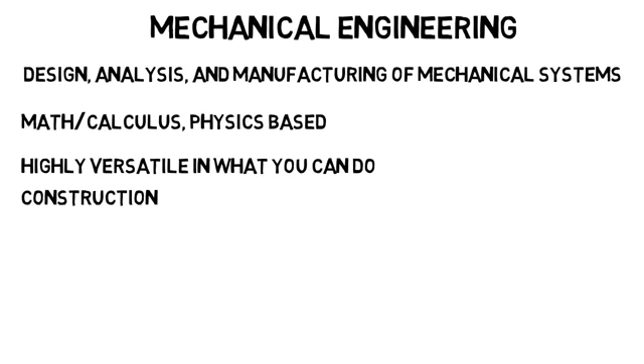Mechanical engineering is a branch of engineering that focuses on the design, analysis, and manufacturing of mechanical systems. This major is highly math, especially calculus, and physics-based. One of the great things about mechanical engineering is that it is highly versatile in what you can do. Students who graduate as a mechanical engineering major can go into construction, automotive, heating and air conditioning, materials, robotics, work in the energy sector, combustion engines, and many more.

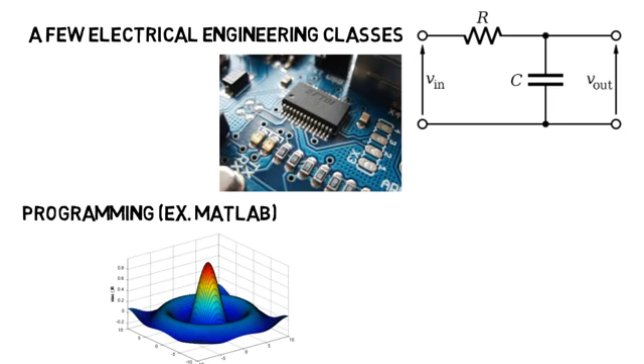Besides mechanical engineering classes, you'll take a little bit of everything basically. You have to take a few electrical engineering classes to learn about the basics of circuits and possibly some of the basics of electronics as well. You have to do a little programming and become decently proficient in MATLAB, a software that allows you to create plots and graphs and do complicated math way beyond what your graphing calculator can do. You'll possibly have to do a welding class, then of course you have to take about 2 years of math, mostly calculus, and about 1 year of physics.

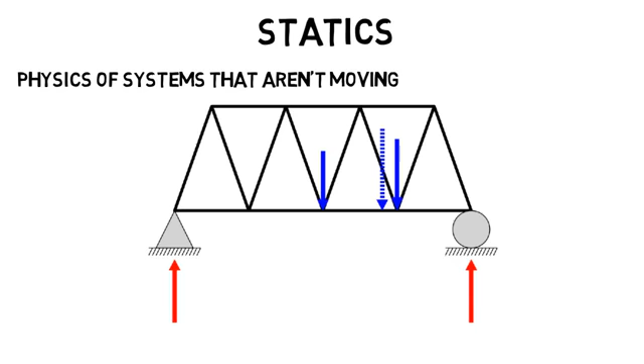The first main class of mechanical engineering would be statics, where you'll look at the physics of systems that aren't moving. This would be like looking at the forces and torques in something like a truss that holds up a bridge, where you have to analyze the forces that individual beams feel due to external forces.

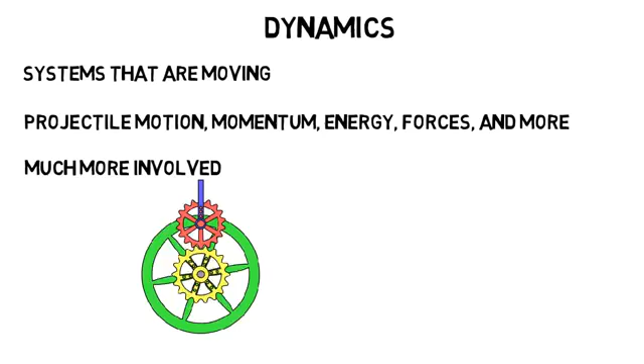Then the next class would be dynamics, where you look at systems that are moving. It's similar to your high school physics class with projectile motion, momentum, energy, forces, and more, but is much more involved. You'll look at the motion of much more complex systems, and have to find things like velocity, acceleration, energy, force, and more of different parts of that system.

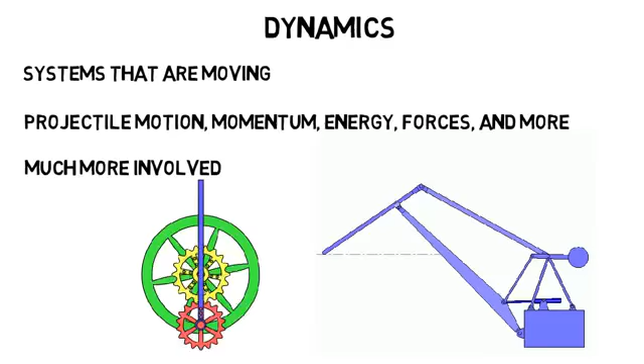Then your third year, you'd even take a more advanced version of this class, where you look at these complex systems, but now in 3 dimensions. So as you can probably already see, mechanical engineering involves a lot of advanced physics.

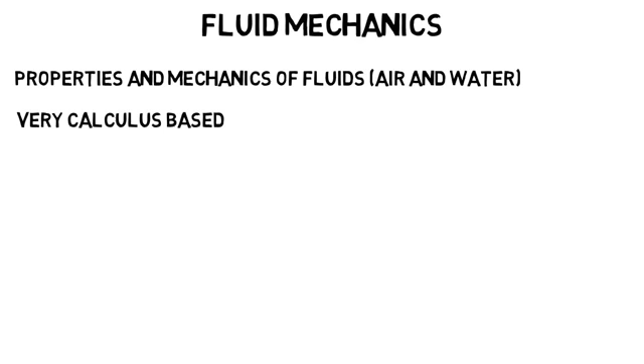When you enter your third year, you'll take a course called Fluid Mechanics, where you'll study the properties and mechanics of fluids such as air and water. This class is very calculus based. For example, you could study how the pressure of water changes as it flows through a set of pipes in a closed environment as height and pipe dimensions change. The principles to solve this are foundational for how your car brakes work.

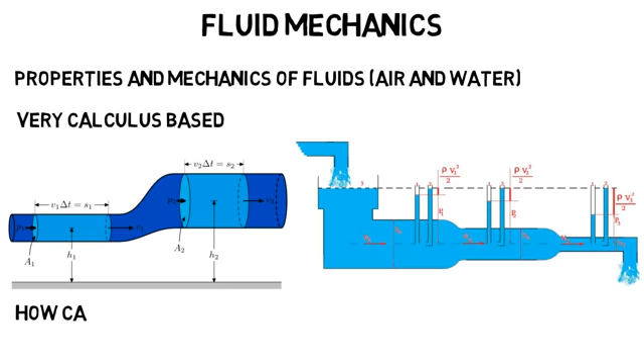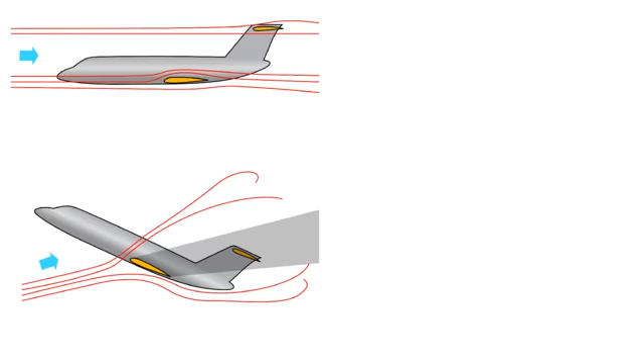This class also includes the physics of how wind turbines work and why they are made the way they are so that they move as much as possible from any amount of wind. You can analyze why different shapes are better or worse. And if airplanes interest you, you could even learn how wind flows over a wing to produce aerodynamic force, which also applies to car aerodynamics, which if optimized increases cars' MPG.

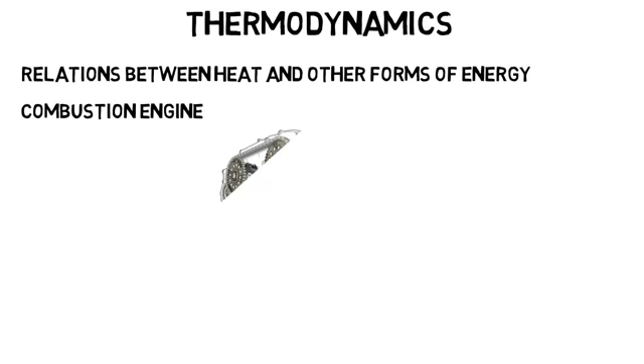You also take a class called Thermodynamics, which deals with the relations between heat and other forms of energy, such as mechanical, electrical, or chemical. In this class, you'll study the combustion engine, which applies to cars, boats, and aircrafts, and you'll learn these engines in great depth and see how they are constantly making adjustments to make them more efficient.

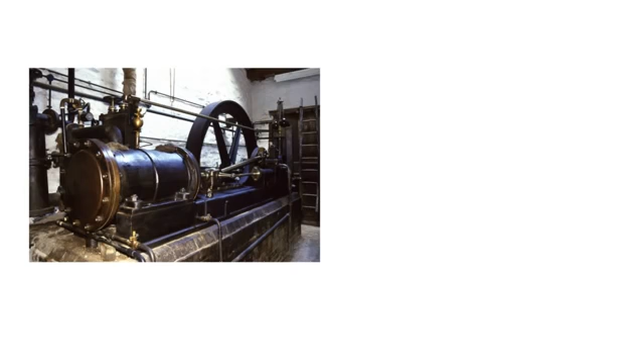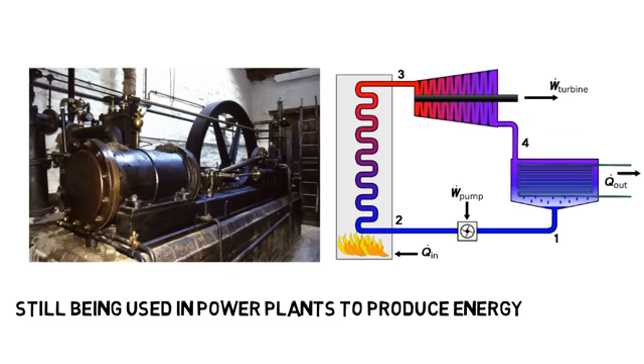You'll go as far back and learn how the first steam engine was created, and you'll learn how similar ideas are still being used in power plants today to produce energy to power your TV, turn on your lights, and power your appliances. You'll then take a vibrations class where you'll analyze the mechanical vibrations that occur in different objects.

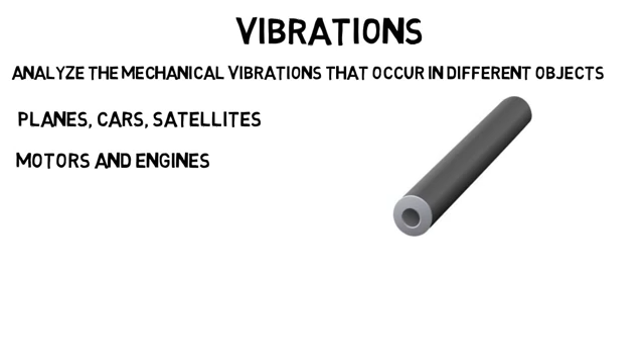Think about if you were to drop a metal object. When it hits the ground, you might observe or even hear it vibrating. In mechanical systems like planes, cars, satellites, and more that are moving but also contain parts like motors and engines that are also moving at very high speeds, it's important to analyze the system down to the vibrations to ensure the system can withstand those vibrations that occur.

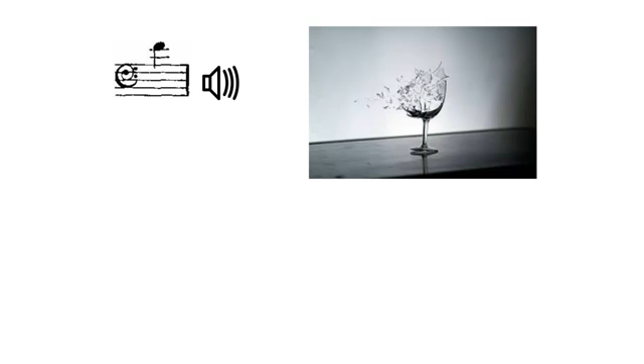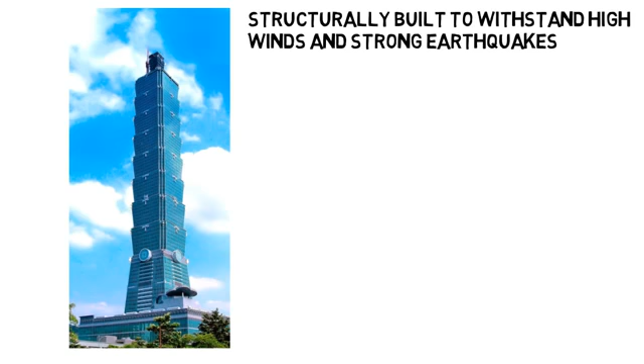Have you ever seen in movies a person make a high-pitched note that causes something like a glass to shatter? That's because the sound is making the glass vibrate at just the right frequency, called the natural frequency, that makes it shatter. Buildings even need to account for this, because in the case of an earthquake, the building will shake and vibrations will be created. This is actually a building in Taiwan that was structurally built to withstand high winds and strong earthquakes from causing strong vibrations.

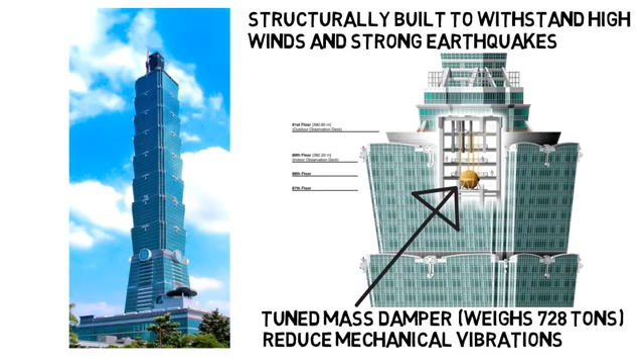One thing they did was put something called a tuned mass damper near the top of the building, which weighs 728 tons and is engineered to reduce mechanical vibrations that can actually save the building from destruction during natural disasters. In 1940, the Tacoma Bridge collapsed, and what they found afterwards was the vibrations occurred due to interactions between the bridge and the wind, which just kept amplifying until it fell apart.

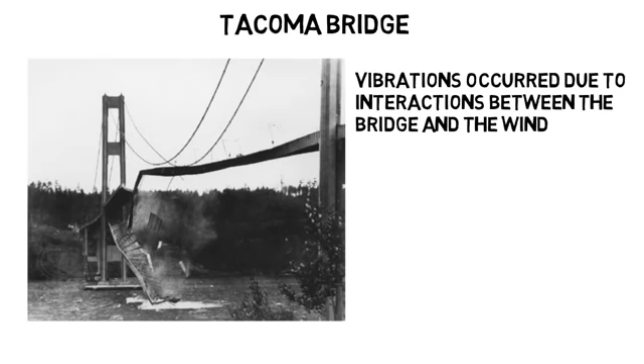Like most mechanical engineering classes, this one is highly calculus based because you have to model very complex systems and motion. Then you'll take some design classes, which are a combination of materials engineering and mechanical engineering, where you'll look at the strength and durability of different materials, mechanisms, and structures. As a mechanical engineer, someone might tell you they need a certain motor to make a million cycles without breaking, or maybe they need it to run for 10 years without breaking. This could even apply to how much weight a beam can support before breaking and how much stress it's subject to with a certain amount of weight.

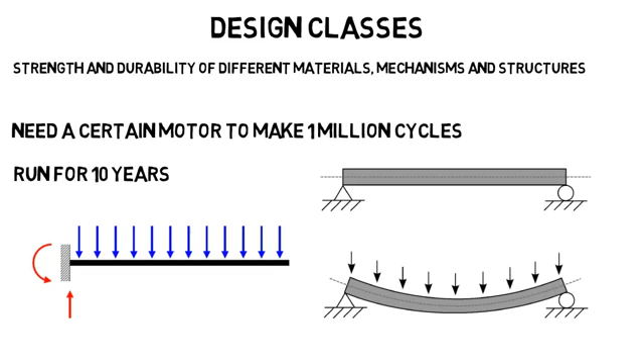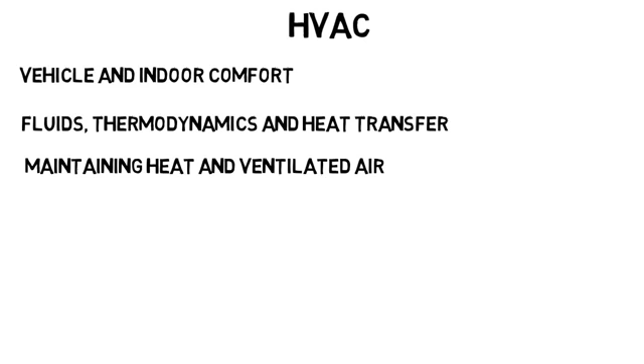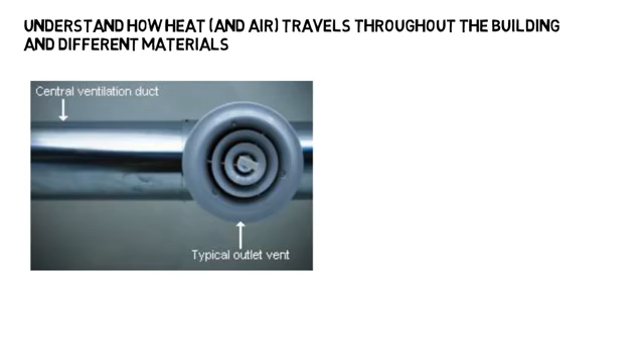Now there are a few concentrations within mechanical engineering. A few specific ones include heating, ventilation, air conditioning and refrigeration, or HVAC, then mechatronics and manufacturing. HVAC goes into vehicle and indoor comfort using your knowledge of fluids, thermodynamics, and heat transfer. An HVAC concentration leads to working on maintaining heat and ventilated air in something like a large commercial building, cars, apartment buildings, homes, hospitals, hotels, and more, where you'll have to understand how heat travels throughout the building and different materials. When you see those ducts in large buildings, those have to be carefully placed to ensure comfort throughout the whole building using knowledge of thermodynamics and airflow.

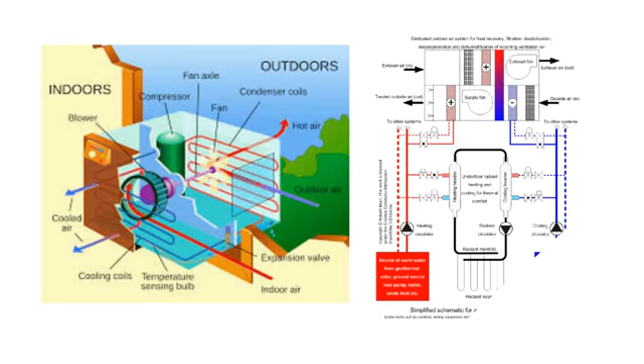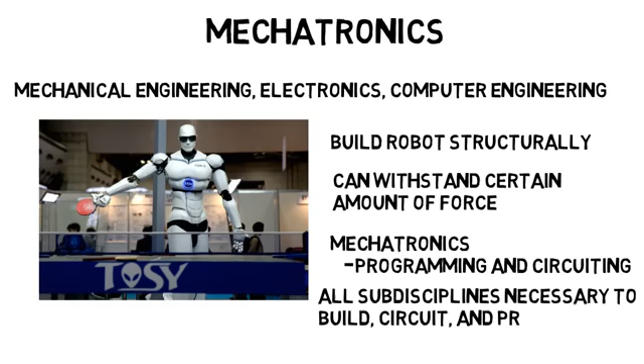It may not seem like it, but seeing how these systems actually work can be pretty involved. Mechatronics is like the combination of mechanical engineering, electronics, and some computer engineering. As a mechanical engineer, when it comes to robotics, you'd be able to build the robot structurally and make sure it can withstand a certain amount of force. But with mechatronics, you dive more into the programming and circuiting of the robot. So with a mechatronics concentration, you'd basically have all the sub-disciplines necessary to build, circuit, and program a robot. This has applications in embedded systems, sensing and controls, robotics, and more.

Now the manufacturing concentration is a little more broad because you can learn things from the design of a part to the actual materials used for the part. Manufacturing might involve learning techniques that help you predict when a certain part will fail. This major will teach you that slight alterations in design or material of a part can have a drastic impact on the overall price, which becomes an important component in the design and manufacturing of parts related to profit margins and running a business. These are just some examples of concentrations, but there are many more sub-disciplines, and as a mechanical engineer you have a lot of flexibility.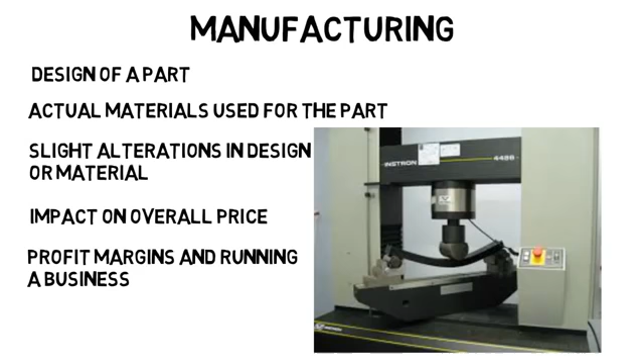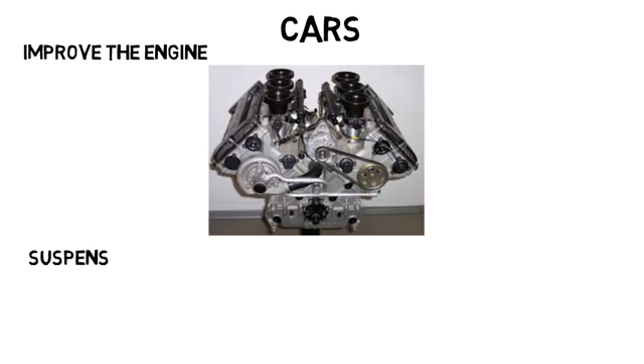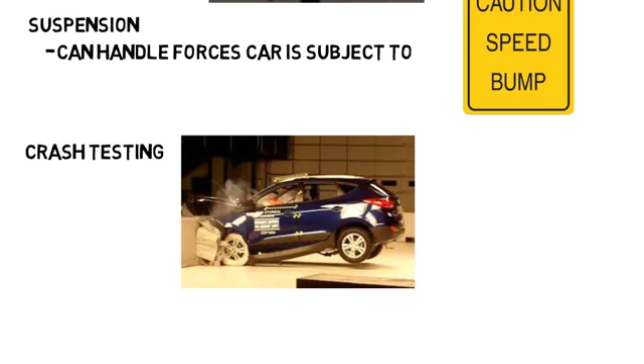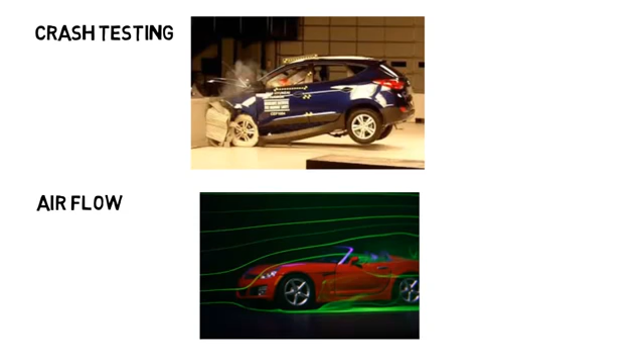As a mechanical engineer you could work on cars, but to be more specific, you could work on improving the engine to make it more efficient. You could work on the suspension of the car to ensure it can handle the forces the car is subject to, like could it handle going over a speed bump too fast? Or you could do crash testing and look at the materials and shape of the car to see what it can withstand and how it would affect a person inside. Or you could analyze how air flows over or through the car and optimize its aerodynamics to make it go faster, using knowledge from your fluids classes.

And this could even be applied to planes or drones. A mechanical engineer could also work with biomedical engineers on things like prosthetic body parts. They might need to help make sure the mechanism is strong enough to withstand the forces it'll have to put up with, or they might have to decide what's the best material to use.

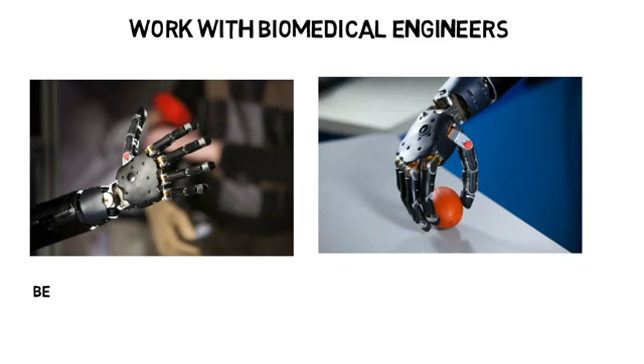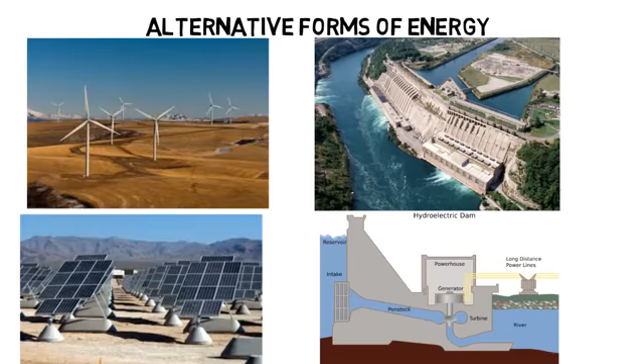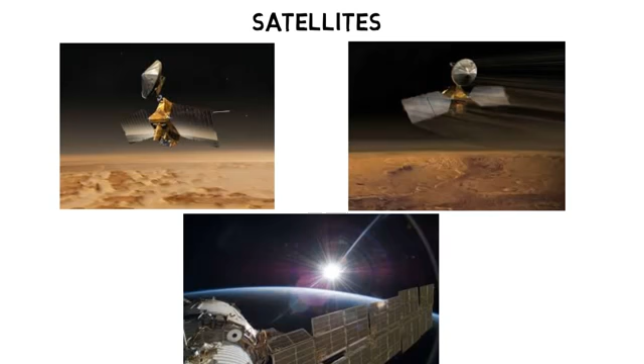Mechanical engineers can also work on alternative forms of energy, like wind farms, hydroelectric, solar, and more. They can work on satellites and use mechanics to analyze the vibrations during high acceleration, or they can use thermodynamics to analyze the temperature differences that satellites go through as they orbit the Earth. They can work on robotics, weaponry, machines, and the list just goes on. As you can see, mechanical engineers really have no limits to what they can see in their career.